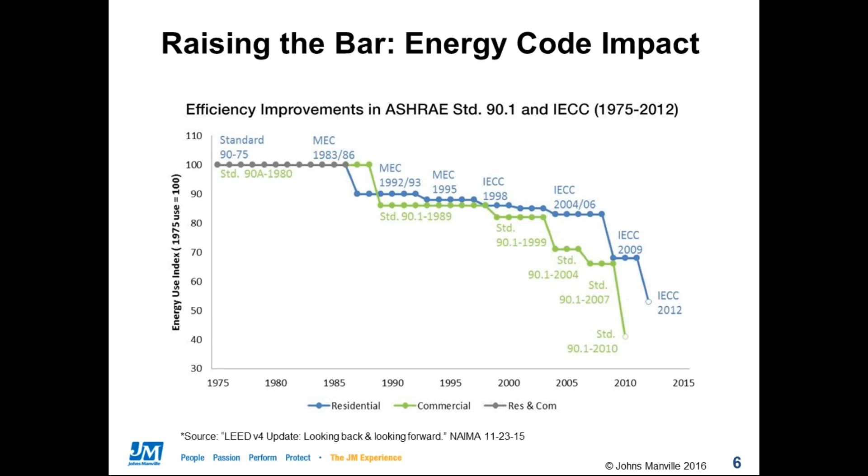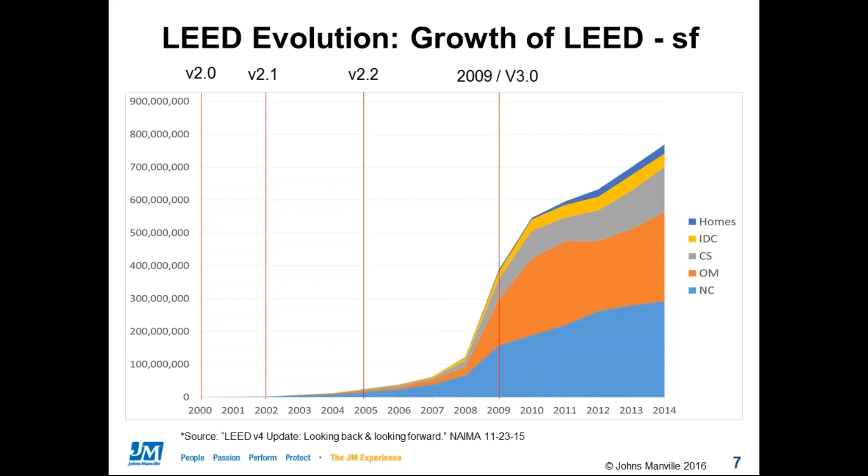This is kind of a view of how the U.S. Green Building Council views the evolving world of sustainable building construction, which they have certainly been a leader in for many years, since about 2000. Certainly the dark blue is non-residential construction. The gray area is core and shell, two of the things that they've started on and driven very, very hard. You see the evolving area in the residential and the very dark blue at the top. This is USGBC's view of the world, how they view the impact of what they've done since 2000 on the building construction market.

Another view, and maybe one not as owned by the people presenting the information, is from Dodge, which used to be McGraw-Hill Construction, and is now just called Dodge. This is how they predict and measured what they feel is the green building market, and green is a very broadly defined term there, and the level of percentage of construction that is out there. And you see they're predicting that in the coming years it will approach the 50% mark. Now, this is not necessarily LEED. This is everything they classify in the green building movement, which is pretty broad.

That would be not just the materials that go to construct a commercial building, but also those things that go in terms of the furniture and everything within the building. The takeaway here for me is that the influence and focus is becoming a more and more important part of the building construction market, whether you look at it from the perspective of U.S. Green Building Council or Dodge, who perhaps is a little more objective.

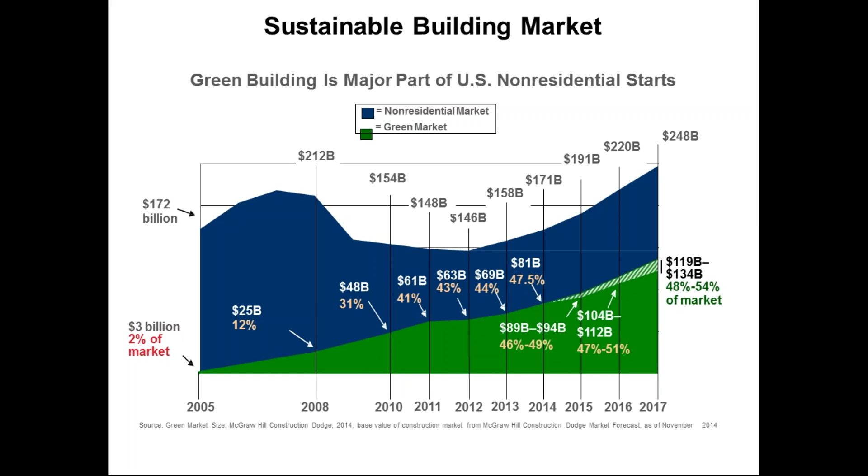But certainly one of the things really driving this trend has been the U.S. Green Building Council since 2000, and their development of what is called LEED, Leadership in Energy and Environmental Design. It's gone through a number of versions since that beginning back in 2000, and we currently have moved just now into LEED version 4, which really started being developed before 2013. And due to a lot of feedback from the marketplace, they delayed the final implementation until this year, where projects now under construction will need to be under V4 and no longer under version 3.

But the goals listed here you see for LEED constructed buildings are reduced waste, conservation of energy and water, reduction in greenhouse gas emissions, improved working and living environments for building occupants, and to lower the overall operating cost. It was very controversial in the beginning, I think, for a lot of people as to what it would cost and the level of effort to go through a LEED registered or certified building. They've made significant improvements over the years.

They have an online registration, monitoring and documentation system that has made it easier for people to participate in LEED. And they've taken a significant amount of feedback. There was an article in a couple of publications about 4 or 5 years ago about how a lot of the schools in the country were built to various LEED certified levels and how they weren't achieving the lower energy costs that they hoped to achieve by building to that level. I think that's been addressed to some extent in V4 as to how you get various points. So we'll kind of go through that as we move through this discussion.

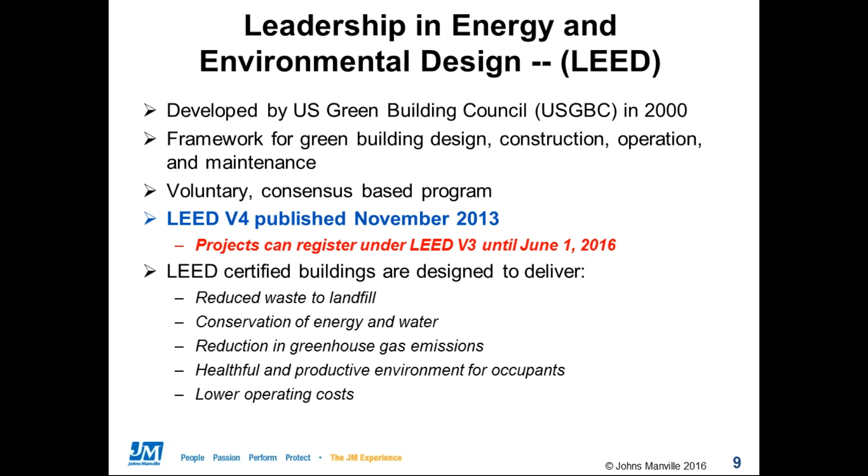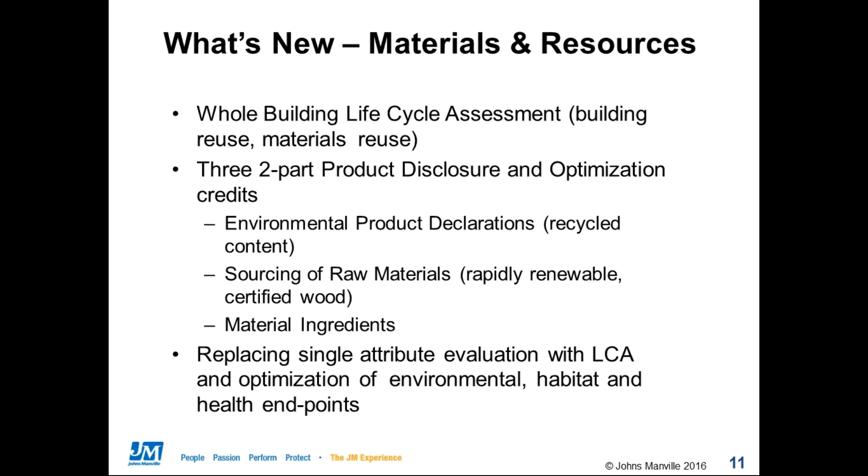So of course we're focusing on insulation and areas within the LEED program where you can achieve various points. One area is what's called MR, Materials and Resources, and it begins to use things like life cycle assessment. There's other things that have been used like environmental product declarations we mentioned earlier, the sourcing of raw materials, what the material ingredients are, and it moved towards replacing a single attribute evaluation with LCA and optimization of the environment, habitat, and health endpoints to this two-part disclosure system discussed above. So a significant change there in this area of MR, materials and resources.

Another area that we've moved into that is new is low-emitting materials. There's been a lot of concern over the years about VOCs, or volatile organic compounds, and how we understand what are the sources of that. The carpet industry made significant strides and changes over the years, partially in response to LEED, partially in response to other feedback from the market. And so measuring the level of VOCs that are put into the environment is something that's of great importance to architects and building owners these days.

LEED has moved in a direction of how those can be measured. They have some standards that we'll discuss later. For example, they had a rating for many years that was GREENGUARD for Children and Schools. That's now been replaced by GREENGUARD Gold, but it measures volatile organic compounds at a very low level. And a second area in indoor environmental quality is not just the air we breathe, but the acoustical performance we live in, the level of noise.

Especially important in schools. There's been a lot of government regulations about the noise levels necessary to support learning in the classroom. Those are in place. Interestingly enough, we have observed ourselves a trend back toward using fiberglass as a duct lining material to reduce noise levels in schools, where 10 to 20 years ago there was a movement away from that.

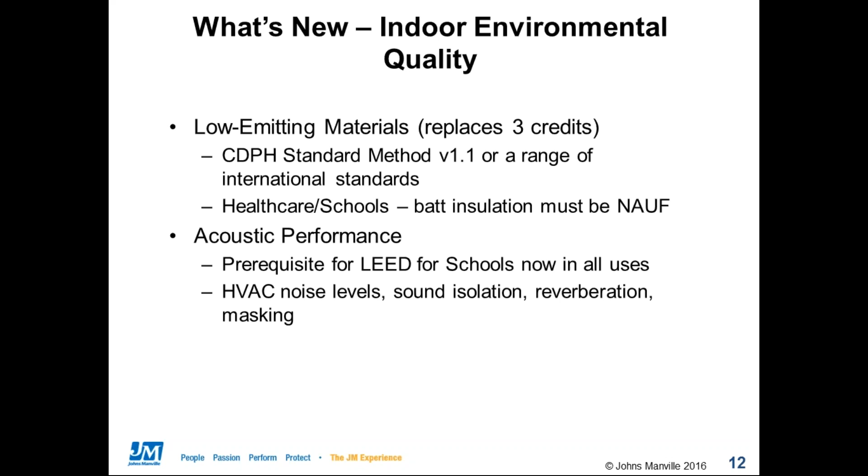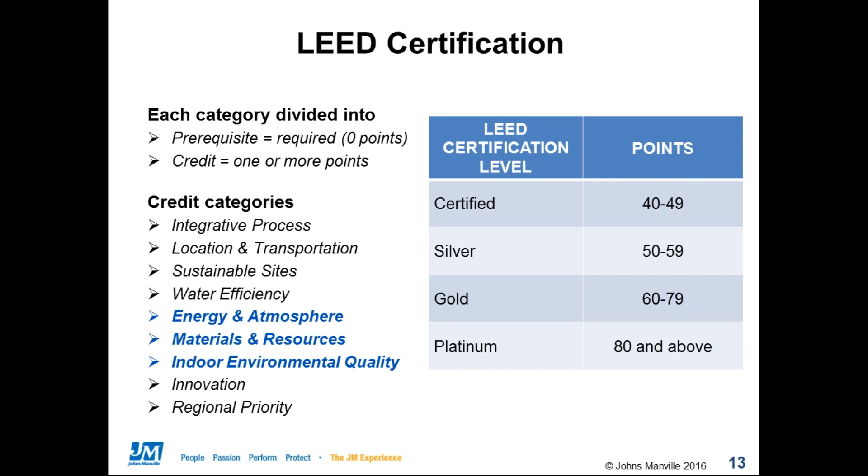Just a quick overview of LEED certification opportunities. Today you can do LEED certified, or different levels of silver, gold, or platinum, and these are the points you need to build into your building system in order to achieve those. On the left are the credit categories that are available. The ones we will talk about today are energy and atmosphere, materials and resources, and IEQ that we've just gone over. Those are where insulation plays the heaviest role, although there is some opportunity at times under innovation.

The whole exterior wall system, you need to think about the windows, and there's a whole evolving trend in commercial construction around the building envelope and the types of construction that are used. It's been dramatically changing over the last 5 years, and the role of insulation and the types of insulation used there has dramatically changed. But it also impacts our mechanical systems, the insulation in the roof, and the lighting systems within the building.

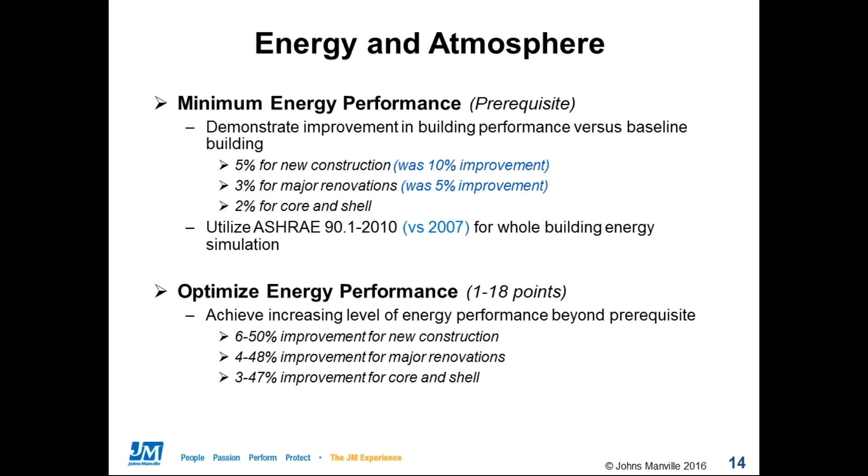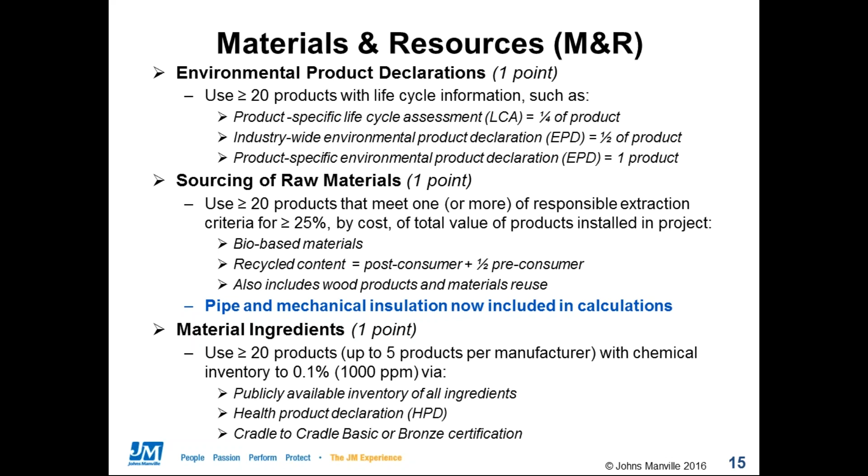Many of our products are either formaldehyde-free, certified to Green Guard, or Green Guard Gold. It's an area of attention that we've put a lot of effort into over the years. Back in the early 2000s, I think 2002, we were the first fiberglass manufacturer in our batts and rolls to go formaldehyde-free with a product, and now the whole industry has moved in that direction.

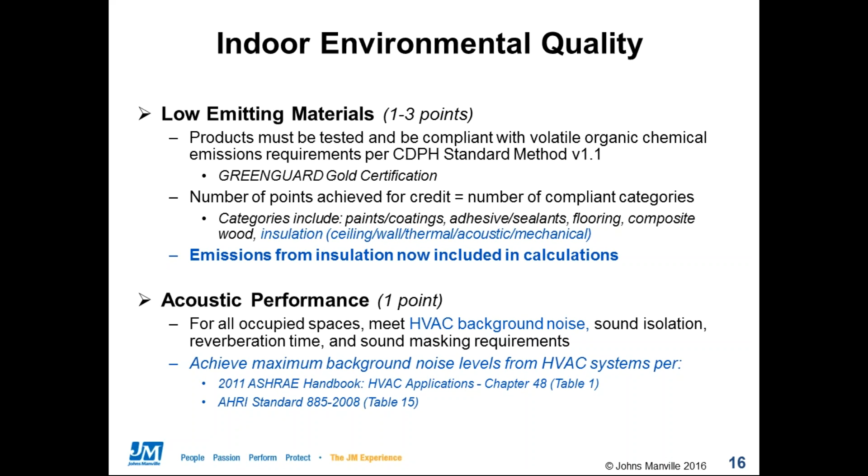And then equally important, we mentioned earlier, acoustic performance, one point, and here is how you achieve those for HVAC systems and the levels that have to be achieved. Insulation, and as I mentioned earlier, our duct liner products, and we do have a ductboard product that is sometimes used in commercial construction as well as residential, have very good acoustical performance and are an area that can be used to achieve points within this category.

Once those are published, we then use those to gather information on raw material sourcing, how we manufacture our products, collect that data, we provide that to a third party, and they do an analysis and present the data in a format that's been developed for EPDs. We then can either self-certify to that information, or we can pay additional monies and get third-party certification from someone such as UL, and then we would have a formal EPD registration on UL Environment.

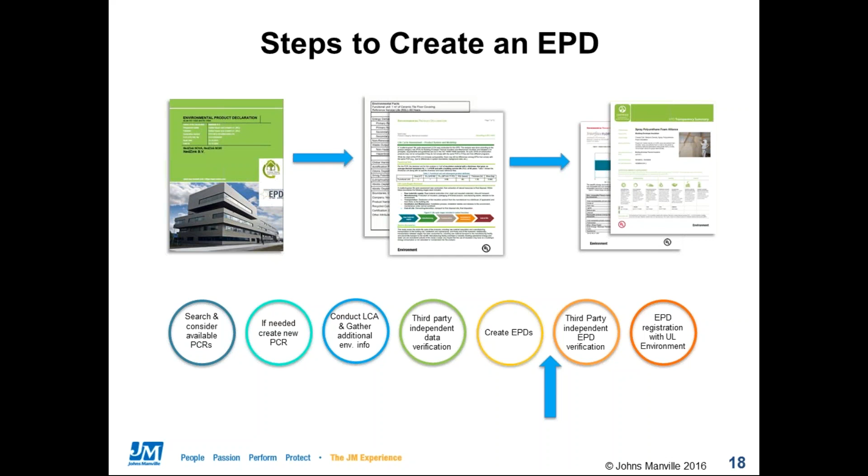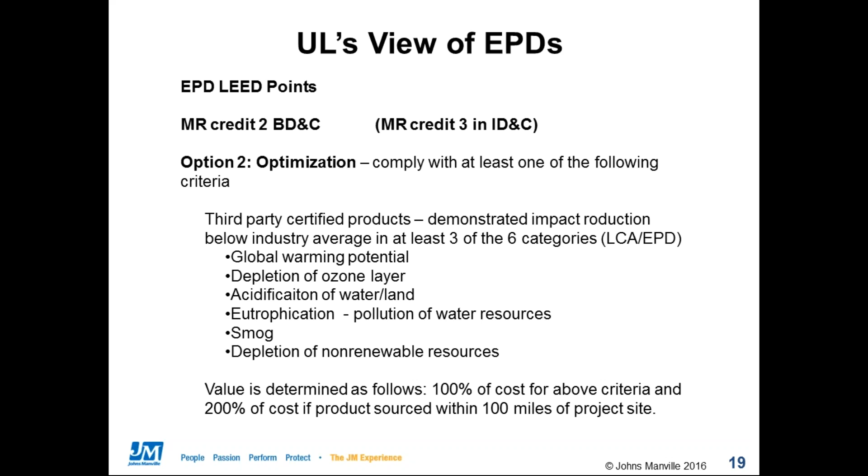Notice that you get 200% of the value in the rating if the product is sourced within 100 miles of a project site. That is quite frequently difficult to achieve when you have an industry such as ours, which is very capital intensive with a few manufacturing plants located around the country. But for those that are close, it is an opportunity. So this is a very big evolving area, as you'll hear later.

But the architectural and building owners and several companies, such as Google and others, have really driven the need for this. And what the designing and occupant owners said, it's very hard for us to evaluate what's going to happen at the end of a construction process in our buildings when we don't know all of the raw material ingredients used by building manufacturers that go into that building. So what we want to see is more sharing of information.

Well, what a lot of us as manufacturers said, you know, we're happy to do that. However, we have a lot of proprietary information. We have a lot of intellectual property that we've invested in. We have a lot of trade secrets that we don't want to disclose. So how can we accomplish these somewhat competing goals? And that's been evolving over time, and I'll show you how it's evolved to today.

But there was something that was set up called the HPD Collaborative as an organization where manufacturers could go through a listing process that did not become public as to all the details, but then the HPD Collaborative would come back with an HPD that summarized the information and the details of exposure so that architects and building owners could make some assessment of what risk they would be taking with that product by using it.

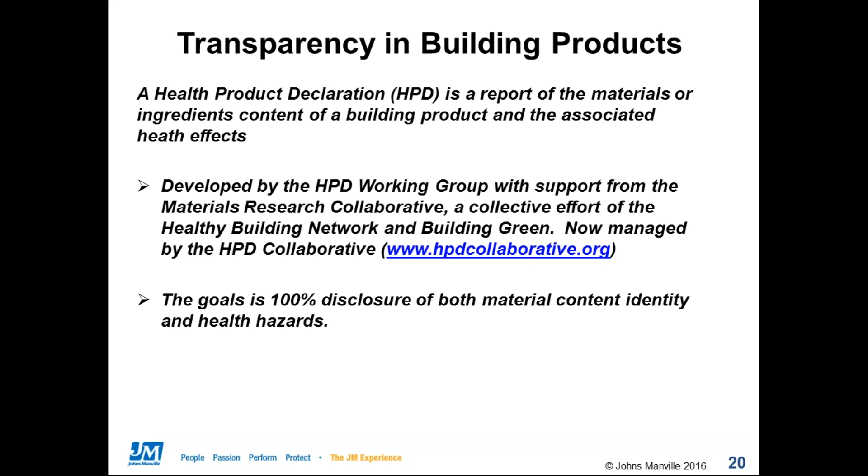However, many of these minor materials that are naturally occurring in nature might be so low that even if an occupant stayed in the building 100% of the time over their life, there is no real risk of health impact. And that has been missing from this dialogue, and we as building manufacturers have been searching for a way to bring that in, and later I'll show you where that may be an opportunity.

One of the things we have as a fiberglass manufacturer is inherently fiberglass is a glass. It can contain a small quantity of some undesirable material, but it is encapsulated in that glass and is never going to either leach out or come out as a volatile organic compound or come out into the air that we breathe. Therefore, although it's present, there is zero risk of impact to one's health.

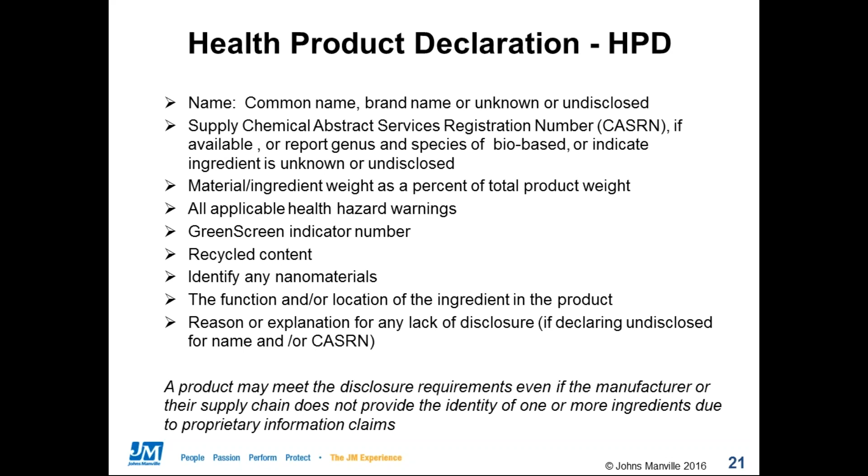And that's the point we're making here. An HPD is an assessment of exposure, but it is not an assessment of the risk associated with the actual use of the product in a building.

So where are we at as a manufacturer? As I mentioned, you see the products that we manufacture that go into a building in the mechanical area, in the HVAC. We have been working for some time now. Those are pretty much complete and will be published shortly.

HPDs, health product declarations, as we were just discussing, are a little bit more of a challenge for us. We've had some success with HPDs being self-declared by JM. We have published those for many of our products at the 1,000 part per million. We have done a lot of testing to see what's contained in the glass that we manufacture and the binders at a very detailed level for 100 part per million.

And there's something new evolving called the ASTM E60 committee that has an approach that we think will balance this risk assessment versus just exposure. And that's the path we are most probably going to pursue. And you'll see in a minute more details about ASTM E60.

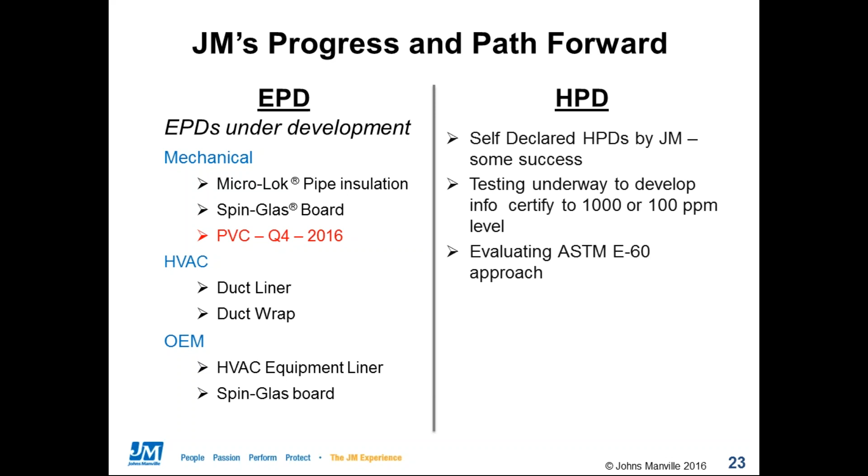One thing I didn't mention earlier is one of the things that did come out very specific in V4 of LEED was non-added urea formaldehyde for that insulation that goes in the walls or the ceilings of a school. The industry has moved away from formaldehyde in general. As I say, we were the first manufacturer to do so many years ago, and all manufacturers now have non-formaldehyde containing insulation batts.

But the collective group of architects, as I've said, really have drawn attention to this over the last several years because ultimately they're accountable and responsible for the design of the building. One or two firms started with some letters asking for more transparency in building products, and over the last couple of years, maybe more than 36 firms now, but 36 of the largest at one time had letters out there stating that they would either require health product declarations or give a preference to manufacturers of building products that had health product declarations.